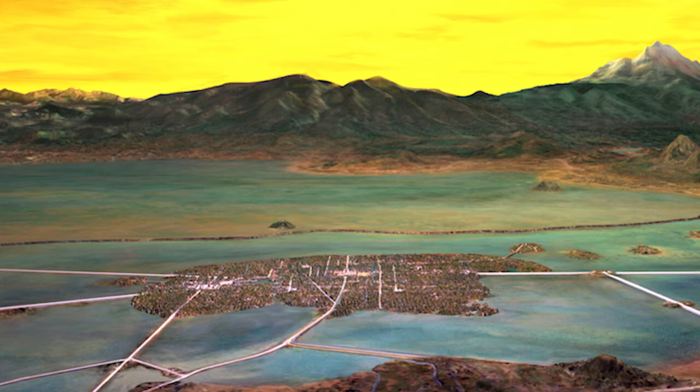And I will start to tell a story about a city that I think is the most fantastic and interesting city in the world, that is Mexico City. And it's a city that has 800 years, more or less. And by the 15th century, it was the biggest city in the world, and it was the Aztec Empire on a lake. This is Tenochtitlan, the Aztec Empire, with the roads that went to the mainland.

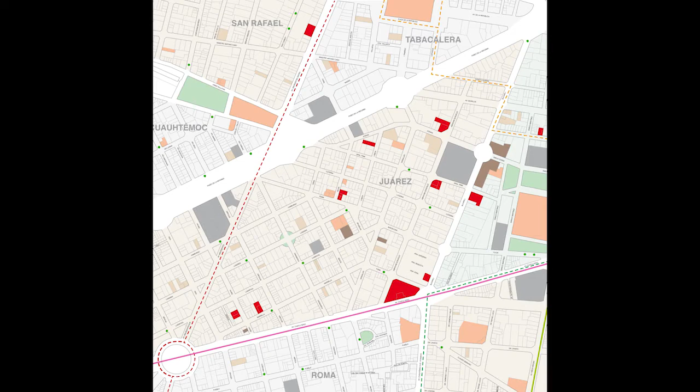So this is mainly downtown Mexico City. The big axis here is one of the most important avenues, that is the financial district. This is the old water aqueduct that went from the park to downtown. This is downtown, the old historic downtown. This is Roma neighborhood, with the fancy art galleries and so on.

And this Juarez neighborhood, that was a rich neighborhood 120 years ago, with all these big houses, was abandoned because of the earthquakes. Probably 30 to 40% of buildings in this neighborhood. Our office is right here. I live somewhere here, and all these red dots are projects that we've done. So we have mapped this area very well to understand the neighborhood and how it can come to life again.

So again, this is the metro system that goes underneath. It's a very interesting subway system in Mexico City. It's probably one of the 3 or 4 largest in the world. It moves 5 to 6 million people a day. So imagine a system that moves that amount of people in a day.

So the first project I'm going to show is this housing project from the last decade of the 19th century. Our clients are developers who found a niche in developing that I think is very interesting, and they've done so well. This is their first project, but now they are doing books and a lot of studies in cities. They say all the developers find new land, put 4 flags, develop a building, sell apartments, and that's it. We want to recycle buildings.

So they started looking for and buying buildings to recycle. Everybody told them they were crazy because it was hard to actually move this through the authorities and so on. But they were young. They knew that this was an opportunity, and they started doing this, and they hired us to do an intervention here. So here is the first time.

All the projects that I'm going to show are from 3 or 4 years ago to now. What I did before in my other firm with my partner, I'm not showing tonight. They are in our book, and they are exhibited. But I want to show this part, because I feel that there's a time when you're an architect that you suddenly say, okay, I don't want to do this architecture, I want to do this other. So this is my new kind of practice now that I really like.

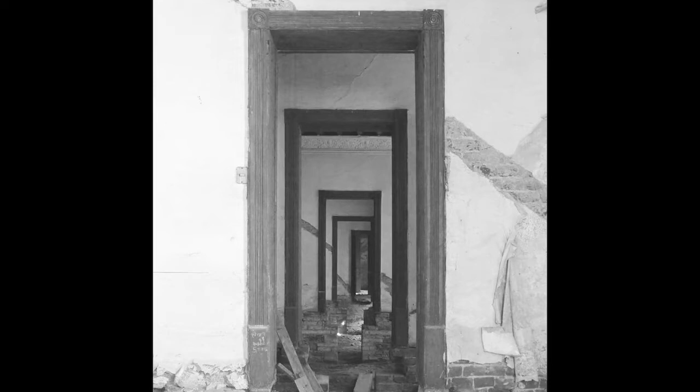So to understand the oldness of the building and the layers, we had to open some plaster areas so that we could see the structure inside to understand how it was built.

I have to talk about some rules that we put, like cutting this. This was in a bad situation structurally, so we had to cut it like a cake to show all the structural elements. So there's 3 rules that you might find interesting that we actually do when we do retrofitting of old buildings with new architecture.

The first one is we never tear down anything that is valuable. So if the building has any value, not even a governmental value, not even a historian that tells you, oh, this building has a value and you cannot tear it down. Even buildings that are not important in architecture, but we think they have a value, we keep the structure.

The second rule is no historic fakes. So anything that is gone, we don't rebuild it. We don't do that. And that's a very important thing in Mexico because little towns, colonial towns, are being rebuilt with all these fake historics. For me, it's a problem.

And the third rule, that is the most important for a developer, is we go for maximum density always. If the site allows us to do 4 floors, we do 4 floors. If it allows us to do 20, we do 20. We don't waste any square meter in the city.

So the black walls are the original structure. And then these slimmer walls that are supposed to be gray, but you see them black, are the new partitions or the new architecture, all the light elements. That's the lower floor. This is the street right here, some commercial area in the front. New dwellings, this was a 4-apartment building, now it's a 17-apartment building. New tower on the back patio with a new apartment.

Second floor, you have a double height here, 1 bedroom, and then you have the bedroom back here. And this is the upper floor for the commercial area. I'm not going to show all the plans, but I just want to show you how. This is the upper part that is all new. There's no old elements. This is the new densification, 2 floors more on top of this house.

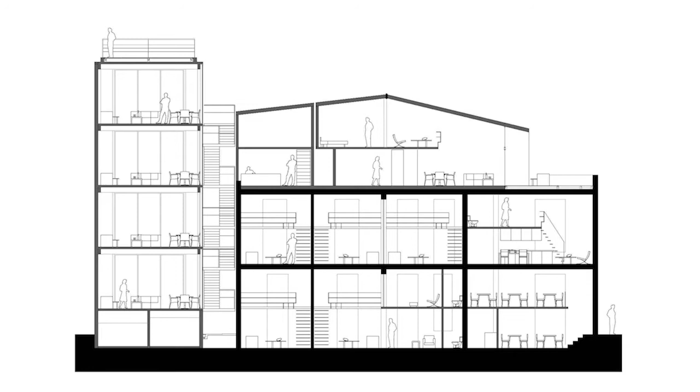This is the old house, or the old structure, and this is the new structure. So you see, it's pretty densified. We went to the maximum density it allowed us. The specifics on this site is you have to leave 20% clear, and then you can go up 5 floors. So actually, this counts as 2, then 2 more, this is 5, and this doesn't count because it's an underground floor.

Now, the structure of the stairs, this is the site next to us, that is a building from the 70s. The new system of stairs is the one that articulates the way to go into all these apartments. It's a very easy system of steel and plates. And you see the relationship between the renovated building, that is this, and the new part, that is this. So always the elements have to be working together, and you have to understand what's a 19th century building, what's a 21st century intervention.

The parking: Mexico City has been very strong in politics against cars in the last years. So before we had a minimum of cars, so if you were going to do a housing building, you had to do minimum this amount of cars. Now the change has worked in the code. We don't have minimums, we have maximums. So you can do zero parking in a housing building, or you can do maximum this amount. So we haven't done any parking with these clients. They are against parking spaces.

This is the building right next to the one I just showed, and this building is a one-family single home from the times it was a rich area. So this was a very rich family living here, and the project I just showed is right here. So we didn't want to copy the same kind of situation in programs as it was. So we needed to do something else. It needed to be a prosthetic that did something different.

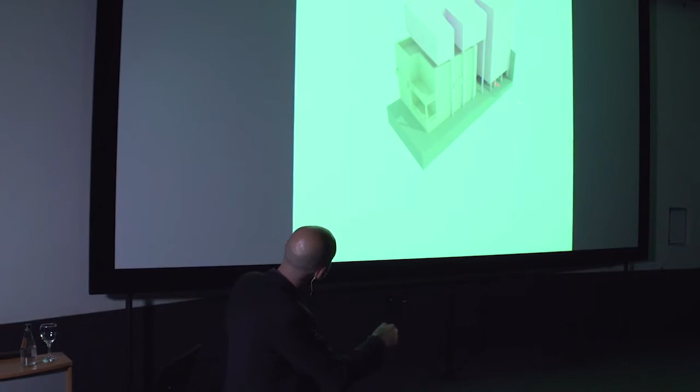So we tried first the idea of having the structure outside and changing the program, not to housing, but to offices and commercial area on the bottom, so that they can fit with each other. We start to work on the volumetrics, maximum density always, and being able to bring light. This is the south. So for us, the south is the light coming in. So through these cuts, we brought light to the apartment building. So different forms of creating that. The form is the conclusion of the light that was coming in.

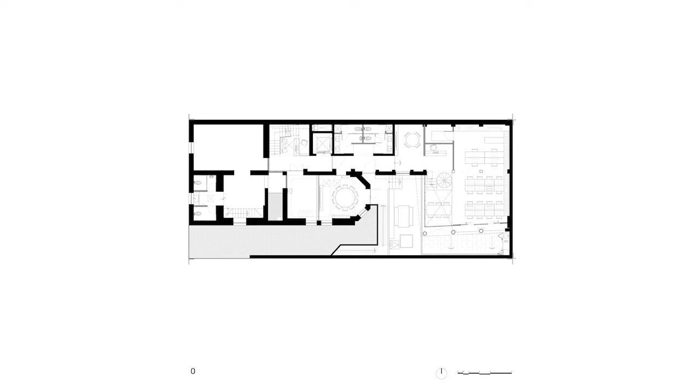And our other building is here. The street now is on this side. And this is the old remaining of the house, the thick walls. And then this is all the new part, this one. So it's like two pieces that come together. This is the coffee place. You saw this picture here. The apartments are here. There's this wall dividing the two properties. But then we open this wall so that the patio interacts with the coffee place here and with the public area.

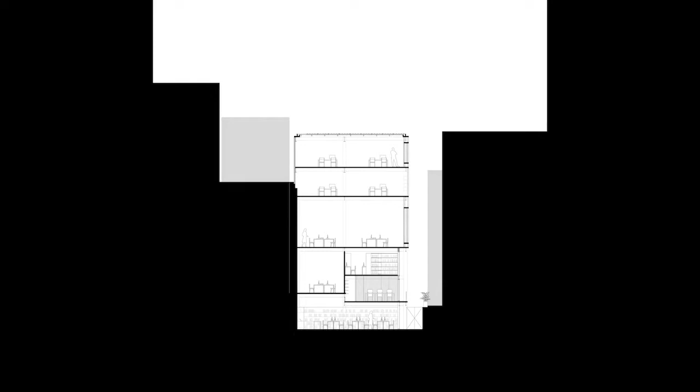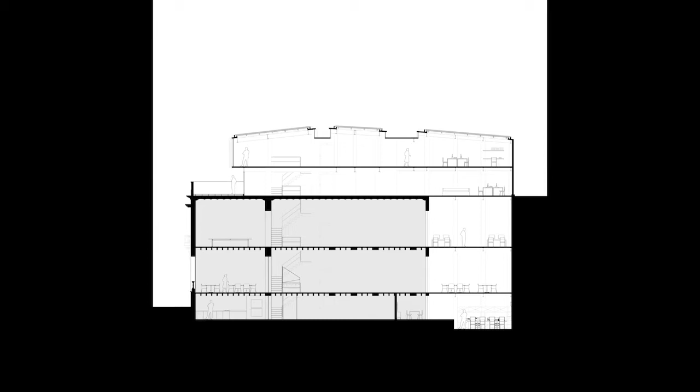Here, oyster bar here, and then a Japanese restaurant on the back. Office building here, and then you go up to different offices. This is the other parking space for the back. So, going up, this is the old house, and these are the 2 floors we put on top. This is a concrete box that is floating a little bit. So you see the density. The density of the city goes higher, and then the old part. So the different floors. And then this is the new structure that is still very light.

And these are all the buildings working together on the back. This is the old house, the previous project. This is the new house of the project that I'm showing now, and the way they work. So the new structure comes through these concrete walls that are continuous, in angle form in each room. So they bring the structure to the upper floors. You see here there's a structural element also that goes through the molding. It's the entrance to the Japanese place that is on the back, that is very small. And the building, this is a 7-story high building, and this is the one that I showed before with the housing on the back. You're looking here at the apartments, the upper apartments, and the office building.

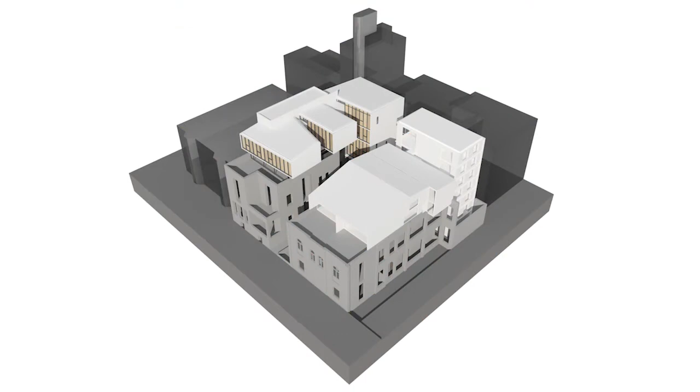So this is the new street that this project is making livable, and now you go there after 3-4 years. This has been going on in this area. It has changed a lot, this neighborhood, without being so aggressive. It's a very simple solution that it's adding without having to demolish big parts of buildings, which I think is the worst enemy of the city, if you have to build and demolish a block instead of doing this.

So the context is the dark gray, the middle gray is the original houses for the projects, and the light gray is the new pieces on top. So in earthquakes, structures, because of the pressure, tend to go sideways, right? So these are elements that actually help to bring this and put back that structure.

Very similar to this movie Crash. You know, how this woman cuts the leg and has problems, but she wants to keep on driving and keep on doing things. So for us, this reference is important, because this is the same neighborhood I showed you. This is a building that doesn't have any value in architecture, at least for the authorities. This is a building that you can demolish in one night and get a permit and so on. Same clients, they told us, we don't want to demolish this. What could you do with this?

So we started doing art shows so that we can have people go in the building and feel the building, start what they thought the building could be. And we discovered the structure was most probably done by an engineer, not an architect. Most of these things are better if they were. Architectural presentations, photographers, artists, using this space, and we waited like 6 months to come up with a program. They hired us, and we said, okay, let's wait until you have the permits. We'll do a sketch for you to get the permits.

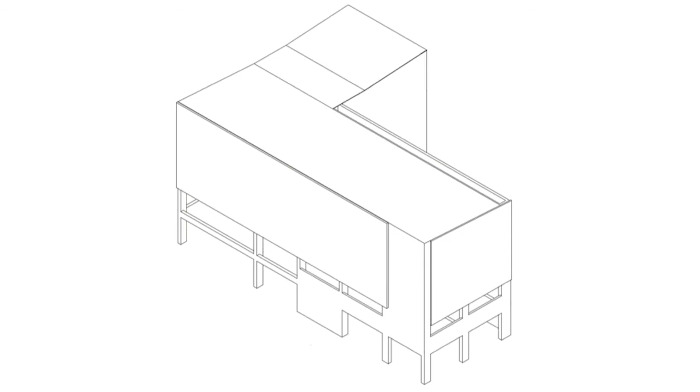But we love the idea. So we started doing this, asking people, getting people involved in the space, and then we knew that the project had to be a public project, and it had to contain public space on the bottom, maybe a market, maybe some market that could go up and could have different public or semi-public spaces on top.

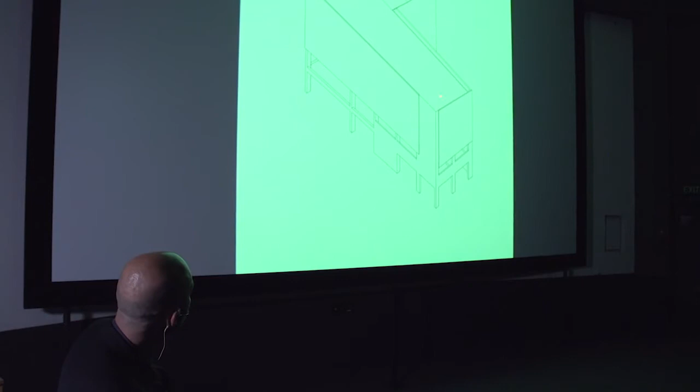So this is the old auto parts building. This was the selling area. This was an office floor, and this was a warehouse where all the boxes for the auto parts were. So you came here, you bought. A person did all the paperwork in the middle. They went up, got the things, brought you the box, and you went out. So it was an industrial building. Very simple structure, kind of what you see there.

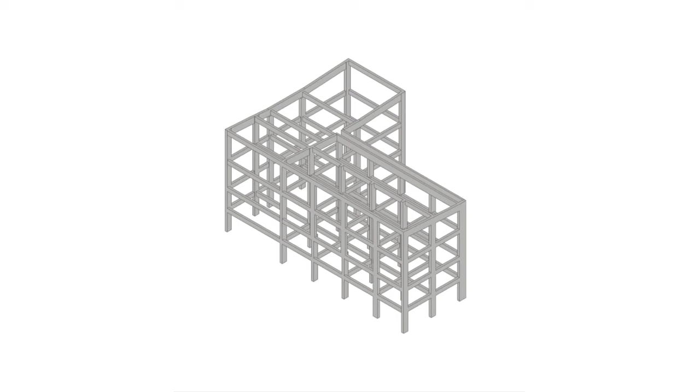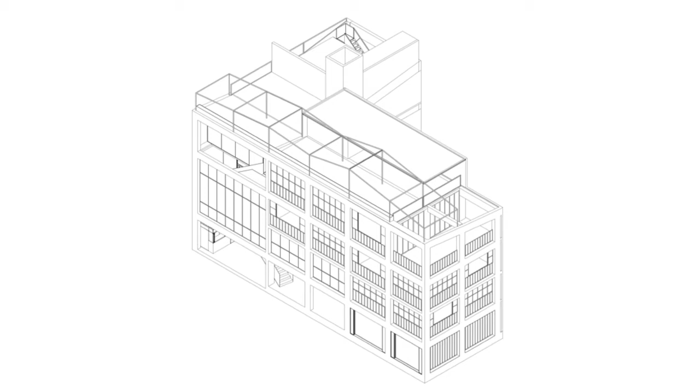So we took out all this, the framing, and then we put some stairs, some frames on the top, and then we made a public stair that went up, cutting these slabs. And then we changed all the facade without taking any structural element out, except some slabs that we cut out. The program is a market that goes up, a yoga space, and a public terrace for a restaurant.

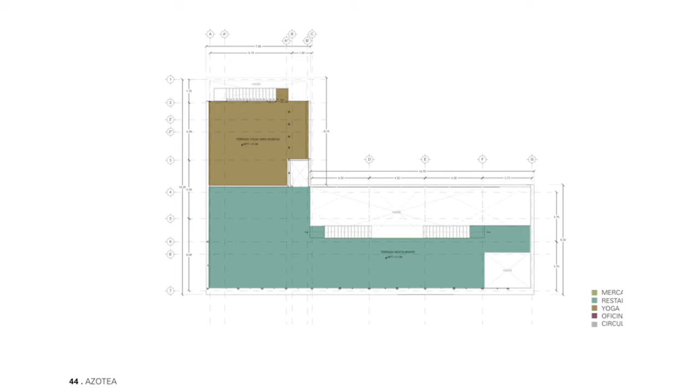So that's the original condition a few years back of the whole area. All these auto parts shops have been moving to a different area in the city because the rents got expensive here. So of course the program has to change, and this is what we designed after that. So taking the same bones or the same body, but changing how to do that. That frame.

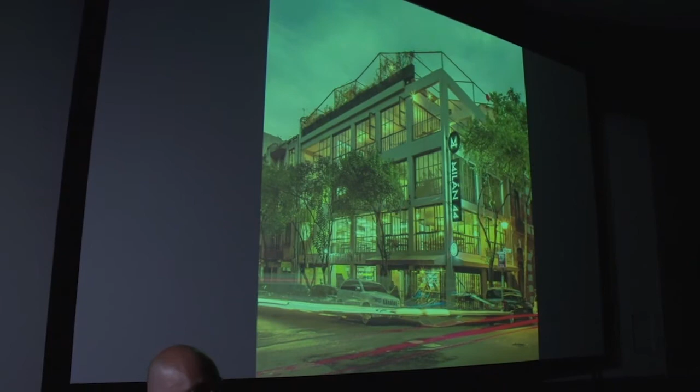I haven't given a lecture in English in a long time, so I'm not fluent yet.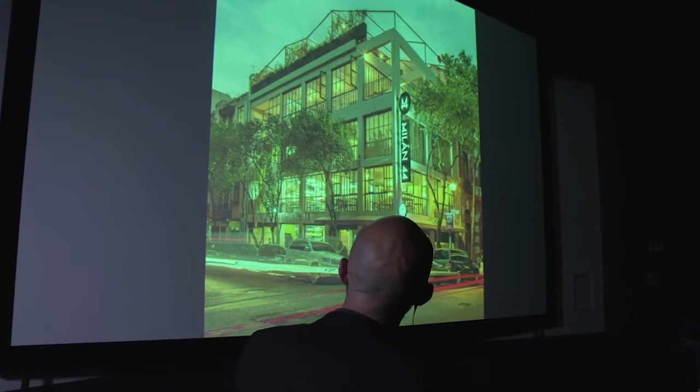This is the new frame on top that hosts the terrace, and then the market just goes on until this floor that is the yoga spaces. So you see, this is architecture in Mexico City, and this is architecture in Mexico City. We have this contrast. So it's a project that aims at the community. We work with the neighbors to ask, what do you need in this neighborhood? We need a little market. It's far to go to the market. So we planned this coffee place. And it's always open. It's public.

Very simple solutions, very cheap. We didn't have a big budget, of course, so it was good for us not to demolish. Also, not demolishing becomes very sustainable because you don't have to bring so many materials to the site. We actually did this building with closed doors, we did all the renovation, and then we just took out the scaffolding outside, and it was done without bothering neighbors. So this is the main stair that goes up. And this is the activity every day.

The weather helps in Mexico City also. It's very similar to Johannesburg. It's very stable, and we don't have big changes through seasons, so we can have an open stair with no problems. Different ways of doing frames and structures.

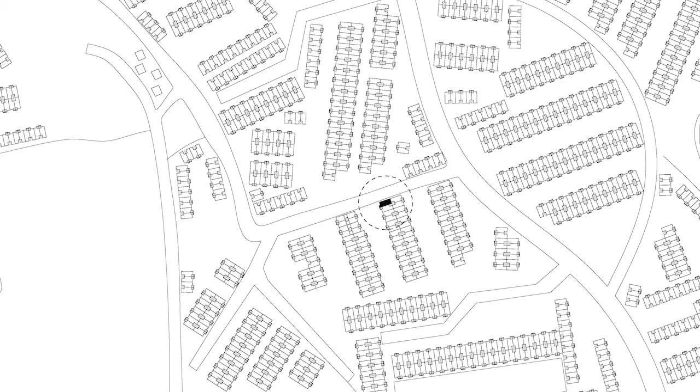and it has all these different areas, and it was very interesting work in this because this is social housing. I'm not sure if it's particularly for Mexico. I think it's a problem all around the world in the last 40 years. Social housing has been, how do you say, decepción, well, a lack of interest from governments all around the world, or lack of vision, or maybe ignorance.

Social housing has been, and I'm sure it happens here the same, I saw some examples today, it has been segregated to the outskirts of cities, and then it has to be placed together with public transportation. Public transportation never comes, never happens, so people spend their time living in a little bus, going to work, and then spending 1/3 of their day transporting just to get to their little house that the father government gave them, right? Or gave them a credit.

So, Infonavit is the institute in Mexico that deals with housing. And they washed their hands in the 80s. Mexico became much more a capital country based on capitalism. And they started to say, well, the investors are the ones with the problem of housing. We'll just give the credits to the workers.

And Infonavit works in a very interesting way. It's one of the best models in financing social housing in the world. Every peso or every dollar that the worker gives for housing, the employer gives $1 and the government gives 1. So it's a third-way party system to give credits. Most of the countries allowed to have access to this credit.

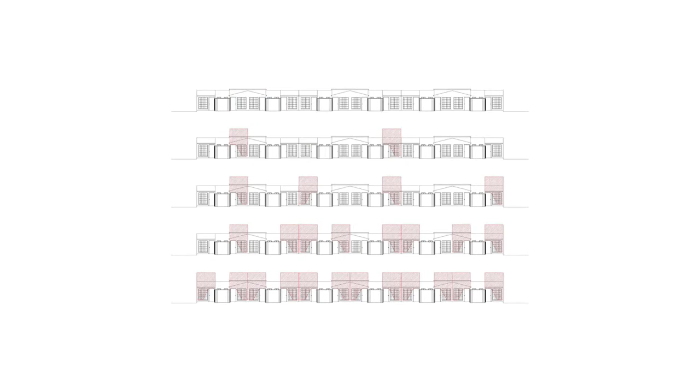So how do you design this? This is something that, for me, is very interesting. Auto construction, that is 95% of what's constructed in Mexico and probably in the world too. How do you design these conditions instead of designing the final solution in form? How do you make strategies so that it happens? So we started with one project, and it's called One More Room. So the government gave us money, like $5,000 to $6,000 to make 10 square meters, and to make an experiment in architecture to see how we can deal as architects with that.

So what we did is a very simple system to grow one more floor with two angles of metal, and the two angles could actually work as partition for glass, as a railing system for curtains, as a system for shelving, as a structure, and also a lighting system if you pass a cable through those two angles and then you bring it down. But also in the exterior, as a pergola, you can actually make a floating garden. So by doing that, this is the main house. This is one house, and this is house two.

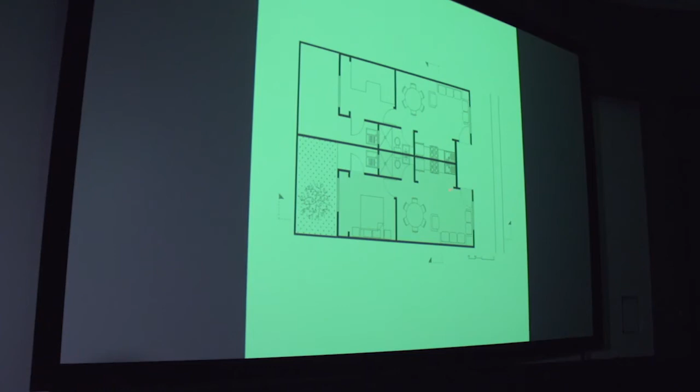You see the program, it's very simple. It's a one-bedroom house. This is the main basic house, 36 square meters, that is allowed in Mexico to build for families. It's called a progressive house. What it means is that you can actually put a stair here and build two more rooms on top. So they give you the first step to your house, and then you build your own. So instead of putting the stair inside, we decided to go outside, using that space that nobody uses. There's also one thing that I feel very interested in, that is the aspirations of housing.

The problem with this type of housing from 20, 30, 40 years ago is that they copy the American model of houses with a front yard and a backyard. We don't use that in Mexico. Nobody likes it. Nobody takes care of this garden. It's our neighbor's model, and they have their front garden really nice so that the neighbor sees. We don't care about this. We care from the door inside. So this is a problem always.

Houses should be built all the way here and give more space to the unit. So instead of putting the stair here, we said, let's keep the space as it is, and let's put the stair on the outside, so that you could have an extension of your home, but also that other promise of having a rent, or another part of the family living upstairs, or it could even be a little office, or a little restaurant, or a salon for

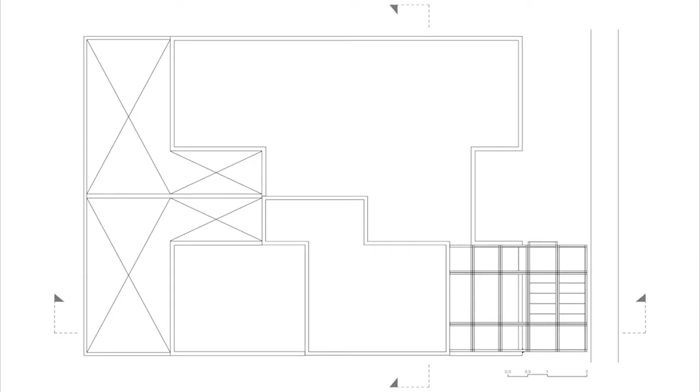nails, or whatever. So this is the new room that you can extend to here and have 2 more rooms arriving from here. You can even have a little kitchen here and a bathroom on top of the other bathroom. Very simple solution with a very cost-efficient material that is steel and block. So the idea is that the structure comes inside. All these walls and this slab don't have any steel inside, and that was very important. We took the steel out and put it in the inside. This is the way they.

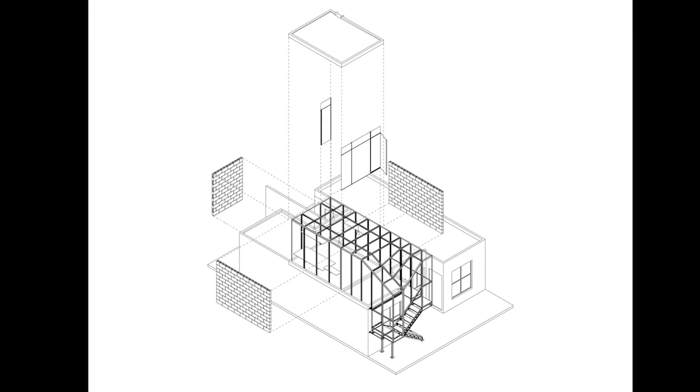So this is the example we built, and then people got awareness of this, and they started to say, how much is that? Well, you don't have to pay. You just have to get a credit because this was part of a program. So if you wanted this prototype, you just have to go get a credit. Your credit is based on this.

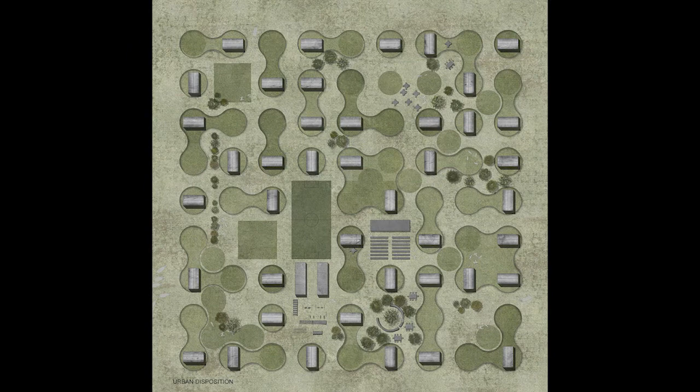This is another example of housing in rural areas. So this is not an existing unit. This is a new kind of prototype for a specific site on the mountains, in a very cold area. An area that has a lot of cattle and chickens, and people work in the fields. So instead of doing cars and roads and things like that, we understood the site as one big site for agriculture. Some parts are meant for agriculture, but also if you start to grow your house, you can eventually grow it further and have some parts for cattle or agriculture inside your home.

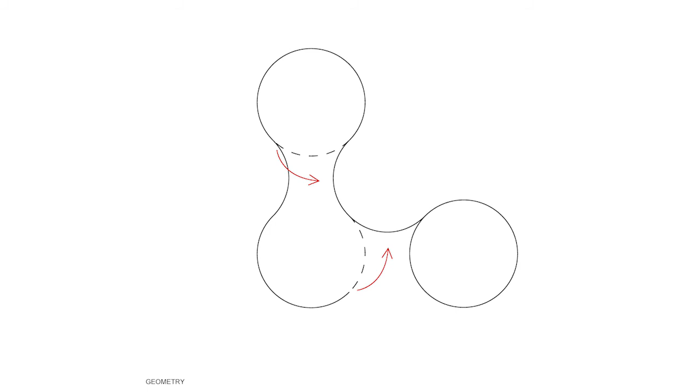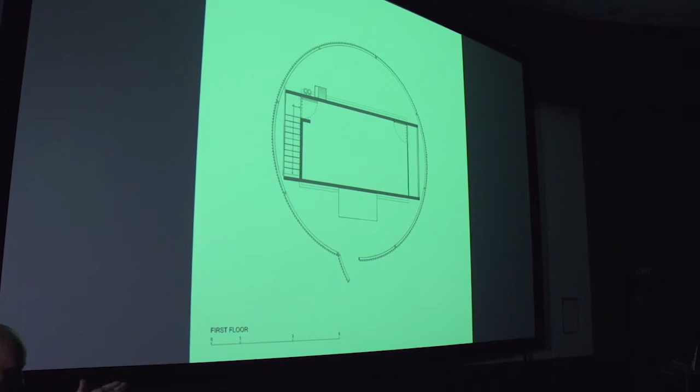So the first phase is the lower house. This is the first structure that gets built. Very simple. This is your property. Then the community areas are out here, and the second floor is for storage first, and then you put these glass walls, and then you can make this a room with an exterior staircase. But at the beginning, it's just a warehouse, the same way farms work, where the upper part of the farm is to store.

So we finished this in a part of our community where we did 2 prototypes to see how they work. These are the prototypes all over the place. This is our prototype, and we started furnishing it with local artists, with local manufacturers. The upper floor furnished. There's another prototype that we built without the upper part occupied. It's just the storage area.

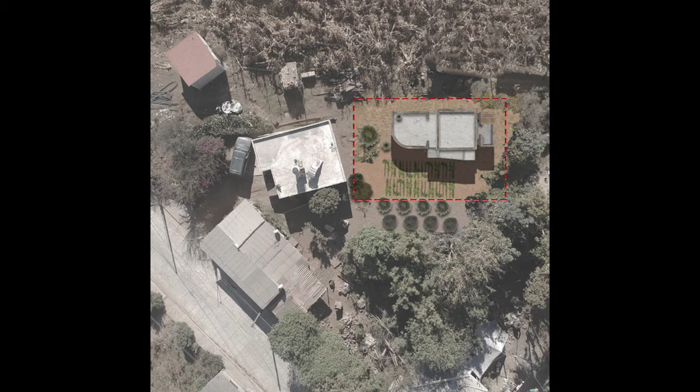So from that, then the earthquake happened a year and a half ago. So this is another state in Mexico. This is the state of Mexico. High in the mountains, it's a forest. It's very cold at night, warmer during the day. Near the volcanoes. So this is a family that lost their home that was here, a little wood shack here. With the earthquake, they lost it.

And a foundation, this is not part of the government, actually this comes through a foundation. It's funny, the story, because this influencer that is very popular in Mexico and the United States, he's Mexican, but he works in both countries. He has, I don't know, 100 and I don't know how many million followers on Instagram. And after the earthquake, he sent a post through his media saying to donate, instead of giving the money to the government, please donate to my account. And he received around $4 million in 24 hours.

So this is a new power of influencing in social media. So he got more money than most of the traditional foundations. So this kid that is 20 years old, he had $4 million to rebuild homes, and he approached Carlos Zedillo, who was the director of the housing unit in the government, and he had a foundation, and he said, please help me to put this money in the right hands, not through the government. And he said, okay, let's do it through my foundation, and let's build these many hundred homes. So they gave us $10,000 for each home. We had to build with $10,000 homes of 50 meters for the family.

They cook with fire, not with gas, not with stoves. So it's an open kitchen. Then there's a little part of the kitchen here with a bathroom, and the living spaces interior. This is exterior. So there's only water and pipes in this little piece. So that's the water tank. This is the kids' rooms. This is the adult room, and then they go out to the roof garden, where they can actually build a new room in the future. That's the water tank. So it's very simple. The solution: the exterior stair, the open kitchen here. And the light only comes through.

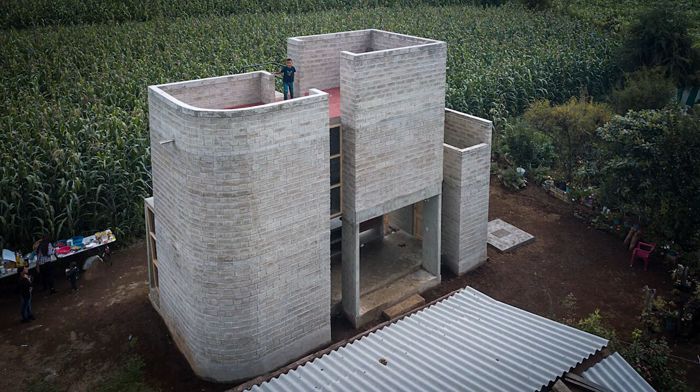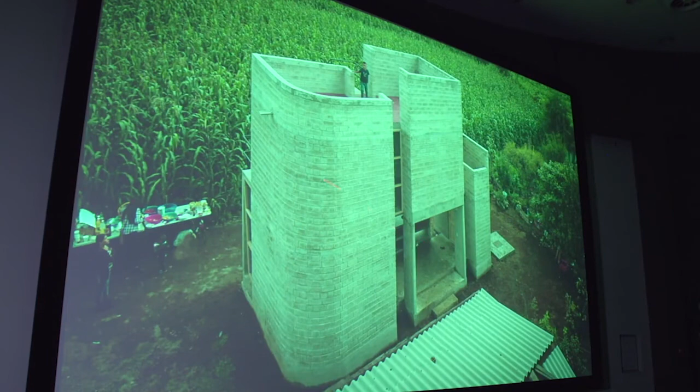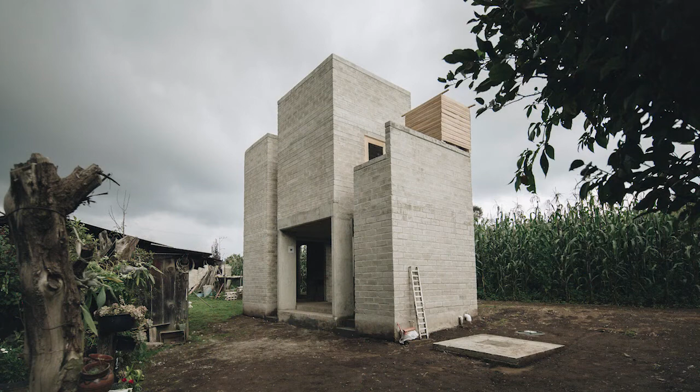That's Karina. That's one of her kids. This is the inauguration, where they did fantastic food. But look at this field. This is a cornfield. So what we wanted as architects in the office was to take advantage of this view, because you can see the volcanoes, you can see the farm, you can see all the town, and she will be cooking while watching the kids run in the yard. So for us, it was important to have that high density. This is the old house they had. Now they use it for keeping stuff in.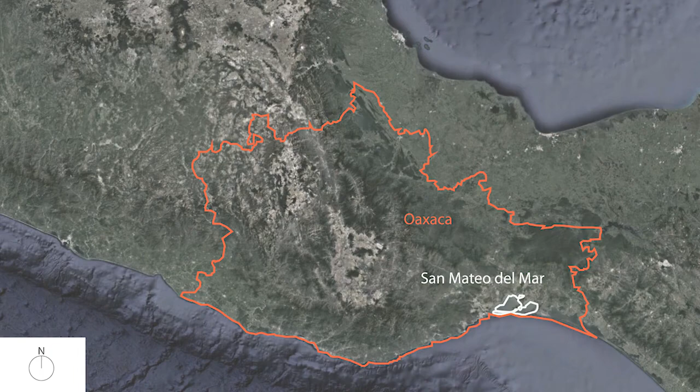And through that project, we got connected with some developers that needed to change the way social housing and especially public spaces work. Oh no, sorry. There's this one we're just building in another part that suffered in the earthquake, in the southern state of Oaxaca, one of the poorest areas of the country, the shortest way from the Pacific to the Atlantic or the Gulf of Mexico. So this is going to be a big infrastructure in the future, competing with the Panama Canal. This is going to be a train and 2 ports.

So this is a very poor area. And we did these 2 houses. It's a tropical area. This is very hot and windy. Very simple system, concrete. I'm just going to go through this really quick. Water only in this area.

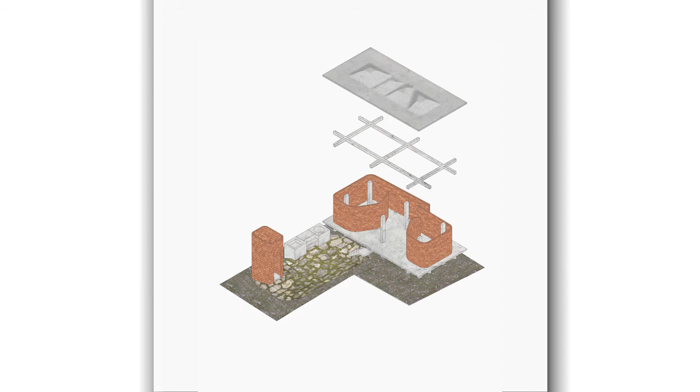It's a swamp, actually. The water from the sea comes inside. It's very open.

And, okay, now the important thing. The parks. I have like 5 minutes, no? I'm just going to finish with the videos, and that's it. Okay. So, let's begin first with this one.

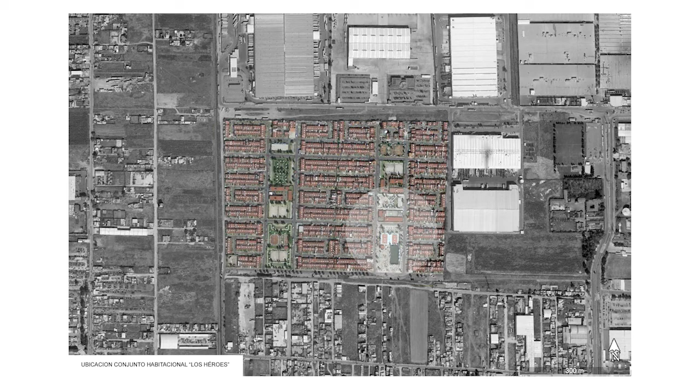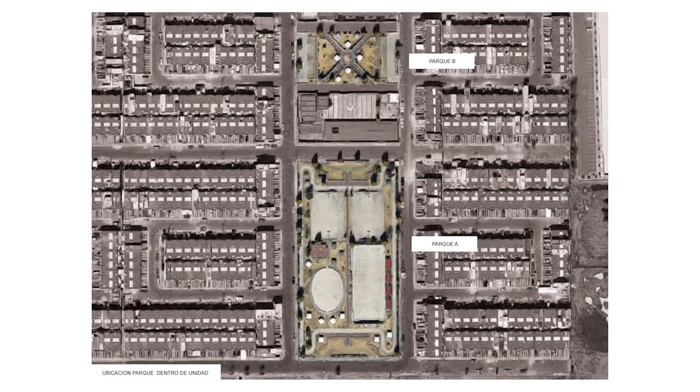A unit, part of a unit, around 600 homes, we were asked to do a prototype for the parks. This is a unit that actually works very well. It has an abandonment percentage of 10% only, so houses are livable. There are families, there are kids. This whole area was in very good quality, because it's close to the center of the city.

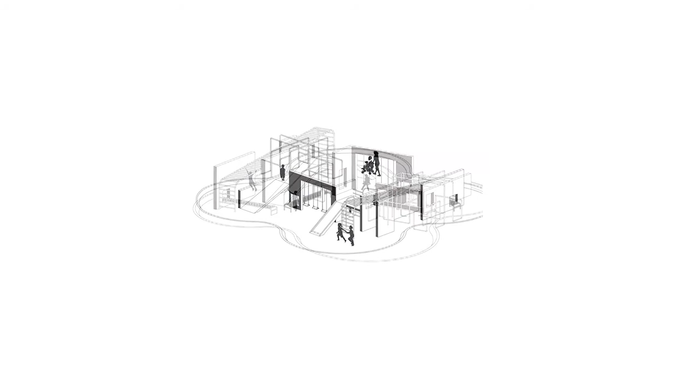So we propose a series of plays, games for the kids, the younger kids, like this, concrete and steel. Some bumps, some different topographical things, and a lot of sports. This is the new playground.

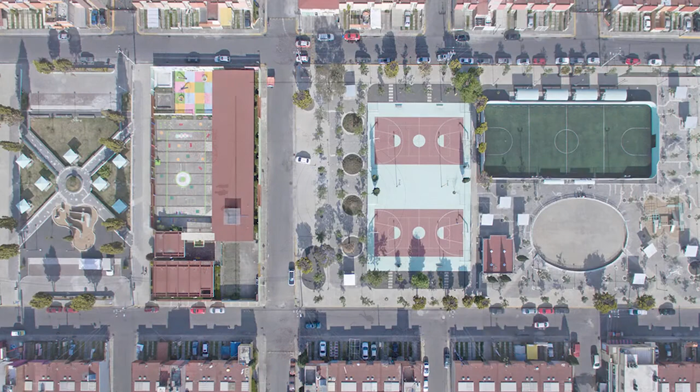I remember one of the mothers of the kids, we were under construction, and she comes and tells me, why are you putting in those games for the kids from the 70s out of concrete? You don't have money for the Chinese ones, the plastic ones? And I'm like, yeah, we have money for that, but they're going to disappear in 6 months. This is going to be forever. She understood that this was the way to do it, actually. So kids are happy with it. We did a very simple job of changing the condition of this park.

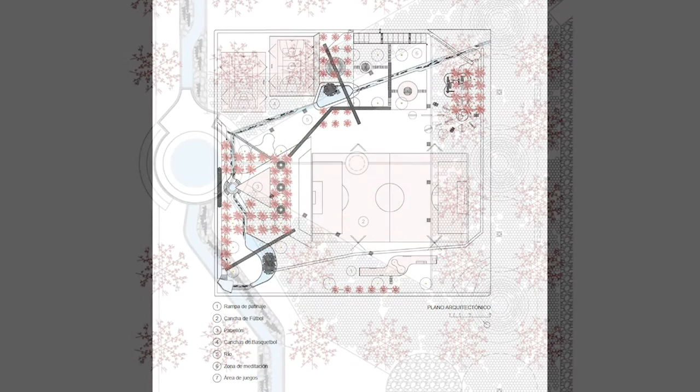This is the other park also. Here we had a big theme with water because we did a new system for the water that was running through that park. This is a design of the pavement. So this is the area for adults. It's a pavilion with water. This is the water running from here to here.

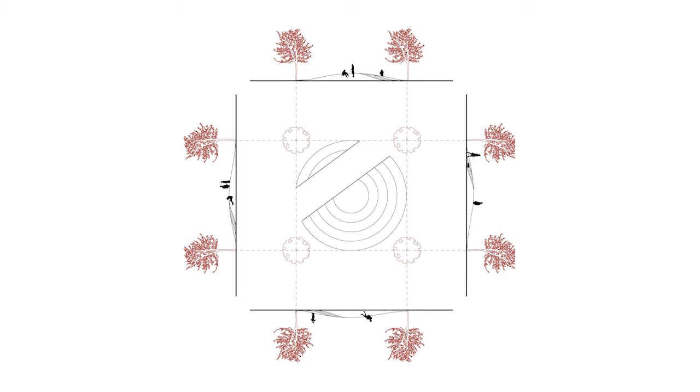When we found this park, the water from here was perfectly drinkable, and once it got here, it was contaminated because people throw garbage and everything. So people wanted us to intubate the water below because it was a danger, the water was contaminated. And we convinced the community that water was super important, and we just had to let them know that the river was theirs and it wasn't a contaminated water system, it was a clear water system, so they can actually drink from there. So now kids play and they go and swim here.

This is an old football field. This is a new area for skaters, younger teenagers or younger adults. And this is a kids area, and then this is a sports area. Oh, also, there's a big connection. The school is right here, so there's another community that goes here. So if you see this path, this is people, all the mothers walking their little kids from the school to this other community that is here.

So we wanted to do that by doing this plaza of connection, because we couldn't make people go around; they just crossed through here, right? So this is the final solution in the design. Very simple materials. This was done with $150,000, all this. And now I'll show you this little video, and that's it.